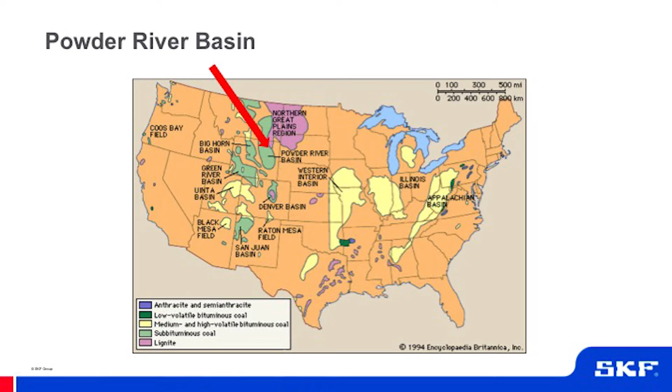For those unfamiliar with the PRB, the red arrow shows the general location. The green shaded area in Montana and Wyoming is where we do our work.

When I was asked to give this presentation, its primary focus is the wireless online condition monitoring. One thing I was talking with some of the guys earlier about - we should be under no confusion or illusion that buying a high-tech system is the answer to our problems. There are many things that have to happen in relation to the purchase, development, and implementation of a wireless program or process that will give us the results of reduced maintenance expenditures and also increase our reliability.

Our focus initially when I joined the company in early 2009 was to eliminate the contracted predictive maintenance that we were paying for, and also the precision maintenance, i.e. alignments, laser mechanical alignments. Early on in our predictive maintenance audits of the plants, we identified several opportunities, one of them being installation and repair issues that we identified with our early audits.

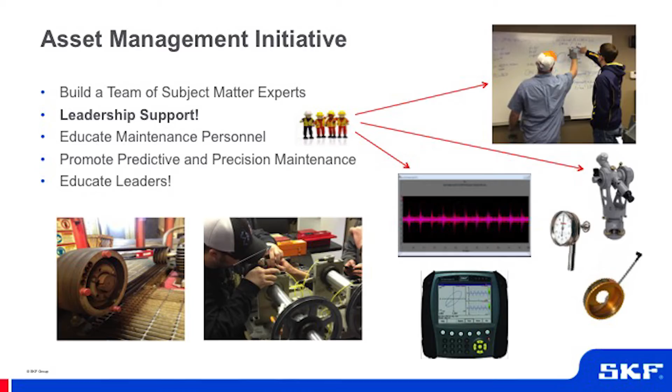This particular prop allows us to put an amp clamp on the power supply, and we'll use a direct couple for a demonstration, and we'll go ahead and move the shafts. Once they've established the collinear axis, we'll move the shaft for an angular or parallel misalignment and show them the increase in power consumption. So it gives them a real good understanding of the importance of precision maintenance.

Again, the people, the psychology is huge. I mentioned fostering the working relationships. These classes weren't only meant to bring the levels of the mechanics up, they were also meant to raise the skill sets of the predictive analysts, and also at the same time foster those relationships. The feedback I've received from both has been exceptional. The students can't believe how much there is in the maintenance world, and I think that alone shows it as a success, and also the greater appreciation for each other's roles.

Those health audits now have a different meaning. When we perform these predictive audits of their machinery, they want to talk to the predictive analyst now. Again, careful promotion of these successes is very important, because obviously the individual that's done the work may have felt very good about that work, and we identify a liability. It's a very sensitive area and needs to be addressed with kid gloves.

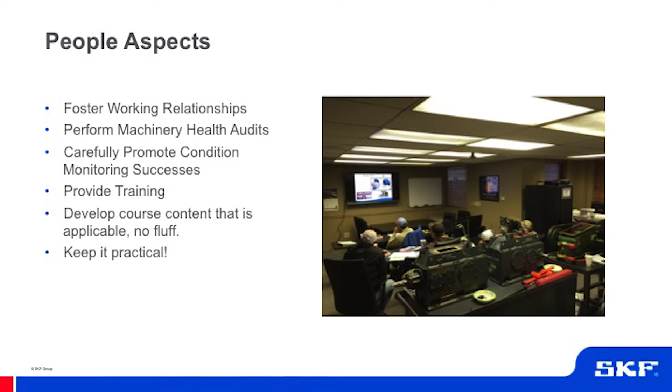Moving on back onto the wireless portion of this presentation, we did select the SKF hardware and software ultimately. The device that proved our concept successfully was a multiplexing unit, and we wanted to move to a simultaneous device like the SKF IMX.

In my previous experience in the pulp and paper industry, I also had used the SKF device at the time for my online condition monitoring, and was very happy with it. The new program, the software we use with SKF @ptitude Observer, is user-friendly, and the analysts prefer it over many of the softwares that we tried while developing this program.

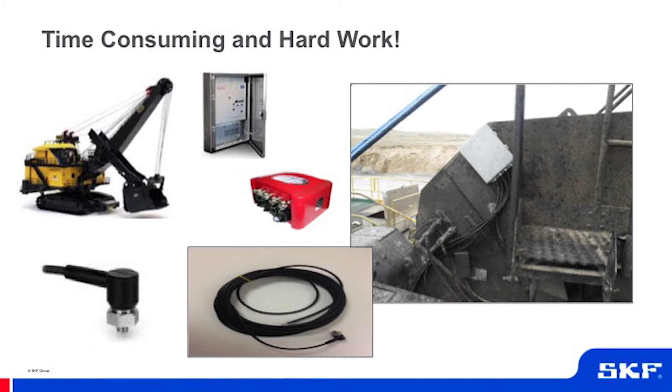I think it's worth mentioning that these programs require a significant amount of commitment. The work involved in installing the accelerometers, running the cables, the J boxes, is tremendous—both internal labor and contracted labor requirements, power supplies, just about anything you can imagine with installing new equipment. So this is not a quick fix. It takes a number of years.

I would say that our project is probably in its 4th year, and we're fairly close to completion with the wireless. This is a simplistic overview of how we communicate, or how we transfer our data files. For obvious reasons, I wouldn't want to go into detail on exactly how we do it, but we are able to wirelessly transfer data. We do transfer data files through our radio from sites.

We collect data 140 miles away with no issues. Fortunately for us, we have an excellent IT department and some networking people that provide us with their expertise to solve our dilemma, because we definitely didn't have any idea how to do it. So big thanks to them.

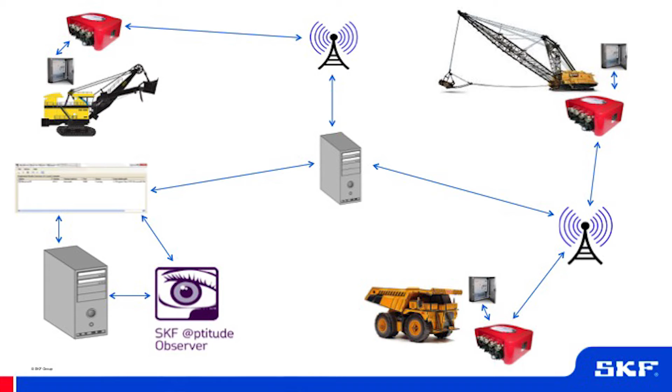The results—I can tell you that our results were better than we had expected. Our 5-man team presently analyzes data received through wireless data transfers of 20 electric mining shovels. That's essentially our fleet, 5 of 6 drag lines, and 12 of our 80 haul trucks.

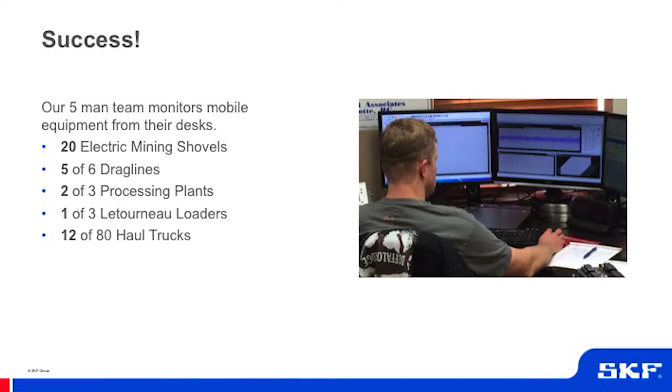So we have plans to add remote monitoring equipment on the remaining drag line and also a good portion of our haul trucks. It's worth noting that of this team of 5 men, 4 are dedicated to the predictive work. When I started with Rio Tinto Energy America, I believe my boss told me it was about $1.5 to $1.7 million annually for predictive and precision maintenance contracted services.

We now perform 100% predictive maintenance and precision, and a majority of precision installation alignments for our company, with 4 to 5 personnel.

When I joined the group, we were somewhat archaic in our means of conveying liabilities to departments. One of the things we used was a spreadsheet, email, and one of the other was a telephone call. So I suspect you can imagine how many missed opportunities arose. So we began utilization of the work request process in 2012.

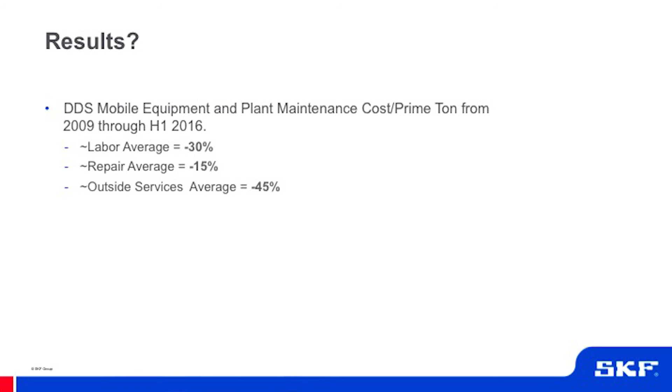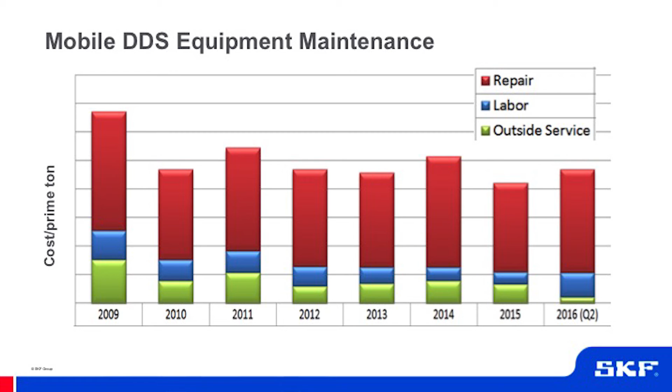Another graph showcasing the continued decline, again this is cost per prime ton. It's worth noting in 2016, we perform typically the majority of our major outages in the first half of the year, so we suspect we'll see a significant reduction in the height of the 2016 column by the end of this year, continuing our steady decline for repair, parts, components, labor, and outside services.

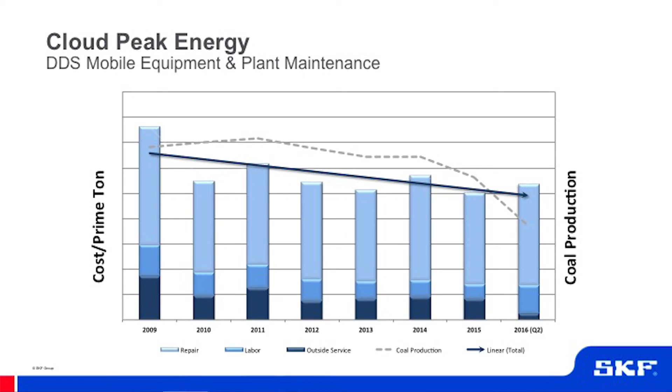I know we're all concerned about safety, and being first and foremost in our minds, Cloud Peak consistently ranks near the bottom, and we do believe that planned proactive work is a portion of this success.

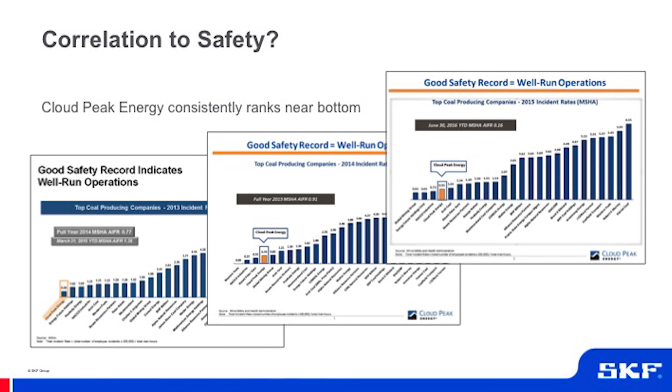As of August 31st, 2016, our AIFR rate is 0.09, and I believe that is the best in our industry. My boss gave me this, and I think it's worth reading: 2.25 million man-hours worked, one reportable incident involving debris in an eye that required prescription eye drops. One man would have to work about 1,100 years to accumulate that many hours.

I'll read this because I believe it's important. Learnings, again, safety: DuPont reported that the most likely person to be injured is a maintenance technician with less than 2 years experience doing reactive work. ExxonMobil reported accidents are 5 times more likely in maintenance when doing breakdown work than when doing planned and scheduled work. In 66% of the companies, 60% of the injuries occur while doing reactive maintenance. The pulp and paper industry concluded you're 28% more likely to have an accident when maintenance is reactive versus planned.

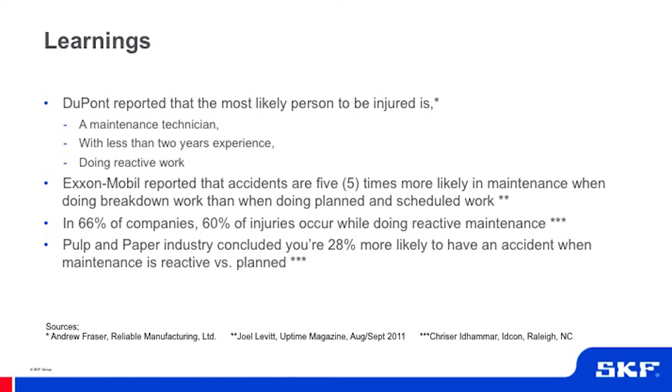Obviously that's the goal of predictive maintenance, is to move from reactive maintenance to either a predictive, reliability-centered, or proactive program. This is an example of real cost avoidance for Cloud Peak Energy. This particular defect was identified on a 7495 Cat mining shovel at our Spring Creek mine in Montana.

The predictive analyst identified a BPFO fault in the outer race. The vibration case—if you look on the left column, the cost was the actual cost for that repair using the vibration analysis. If this would have been a number of years ago, I suspect the degradation would have continued, and the likely cost, if you notice on the right column, we do have a delta of $1.2 million just for this one example.

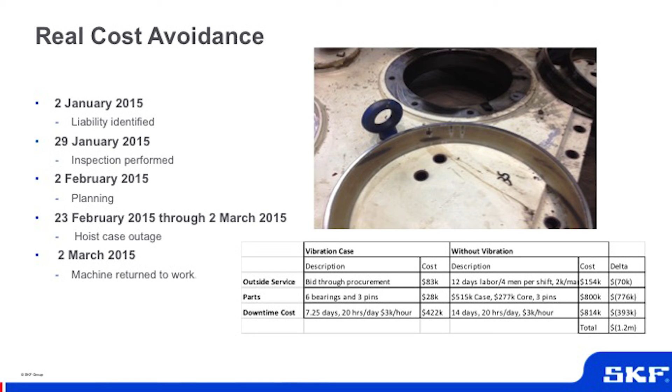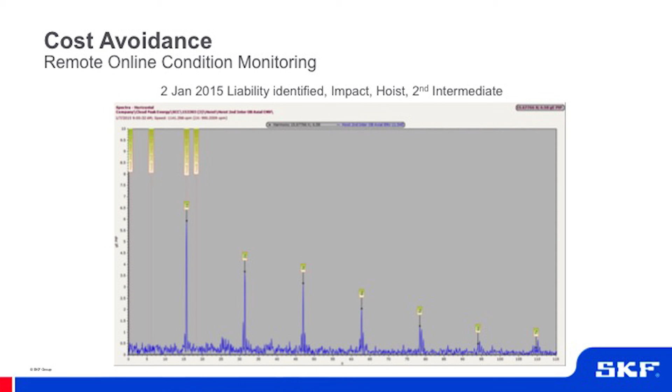And this is a waterfall of that data, so you can clearly see the defect presence.

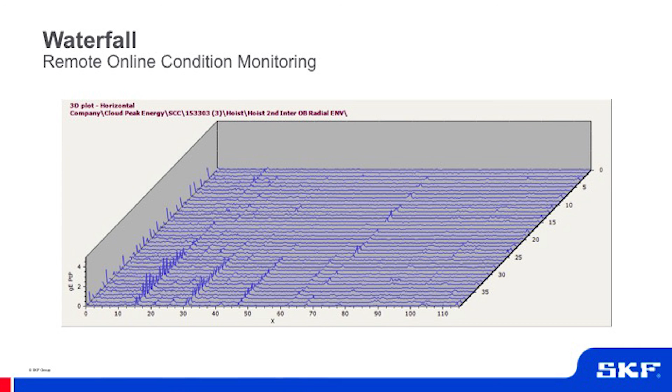In summary, we believe that predictive maintenance, and especially the mobile equipment wireless capabilities, has played a tremendous role in reducing our cost and also improving our reliability. But we're not naive enough to believe that the most important part of this equation is the people we work with at the sites—the mechanics on the drills, the drag lines, the shovels, and then the plants. So all the things that we put in place help foster those relationships and improve skill sets to where we work together as a team.

Tim, thank you very much for that. You bet. Okay, I'll buy you a new battery. Just one observation, I think. Thank you, that was a very compelling presentation.

As we heard from Cecilia at mining.com yesterday, commodity prices are clearly taking longer than expected to recover. Now this makes the need for innovation even more imperative. What are you doing to address this in terms of your strategy? Well, as I mentioned, I do believe that the training and having a better understanding of our predictive capabilities, utilizing the systems that we put in place, will continue to reduce our maintenance expenditures and improve our reliability. So that's our job, and I have no doubt we will continue to be successful.